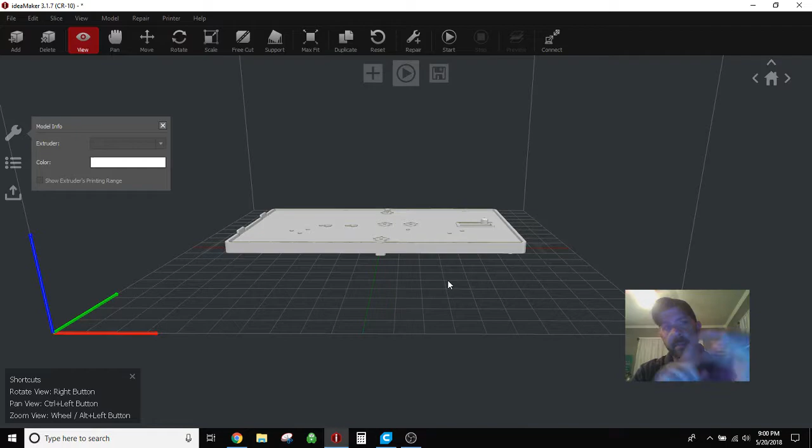Another little Ideamaker tips and tricks video. This one's going to be about orienting your part and even slicing your part, like physically slicing your part, to cut down on print time, material cost, all that good stuff, while still providing a good quality part.

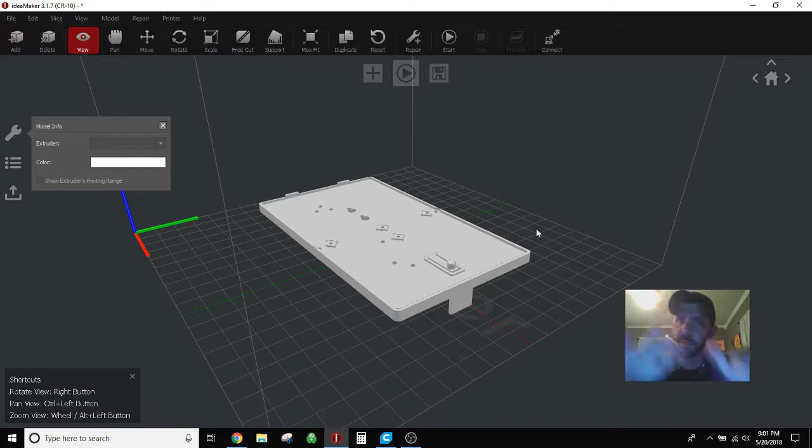So I had this situation come up. One of the mechanical engineers at work had designed this bracket, and for prototyping, he has a printer at the office, but isn't very good at it, to his own admission. And so he was sending them off and having these things done in various different materials, including SLS, so the laser sintering, right, with powder. And this particular part was coming out all warped when they gave it back to him.

And so I said, yeah, next time just throw me the part. Let me try it on my machine, because I really wanted to see if I could get a good part and keep it within tolerance, and I did. So I printed this part in PETG, and it was a very challenging part for a couple different reasons.

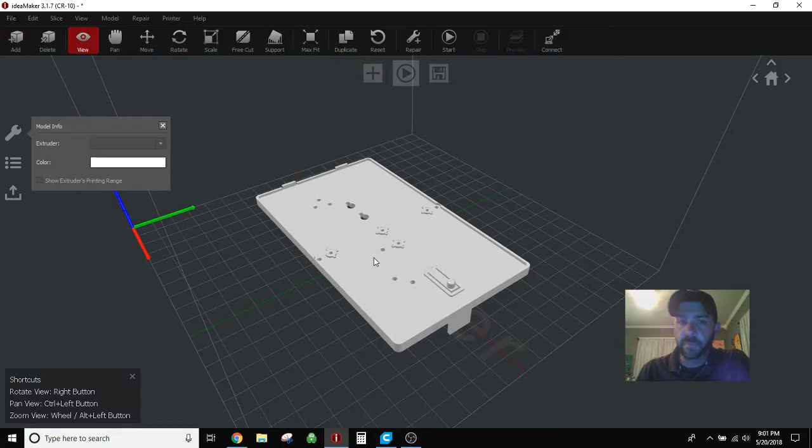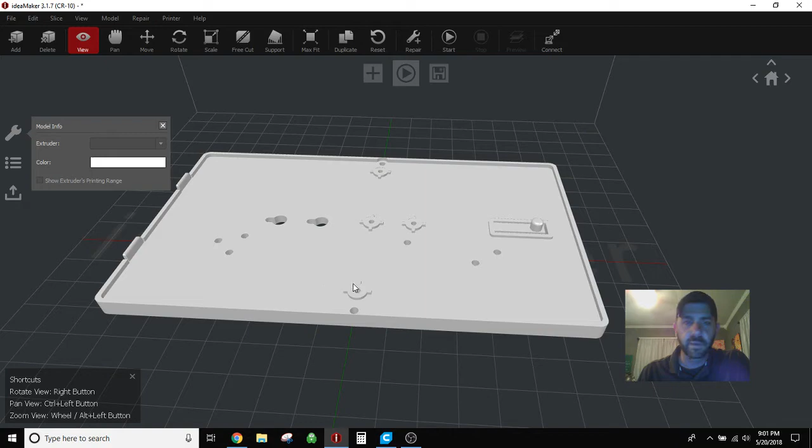So you can see it's not laying flat on the bed because you have the standoff here, and it's got lots of features on top. It's got this little springy mechanism here with the little tabby tongue thing, right? So this thing's going to go like that, and it's got a couple of tabs here, lots of through holes and lots of features. But then you flip it over, and you have even more. You've got a lot more standoffs, and you have these rails that are sticking up.

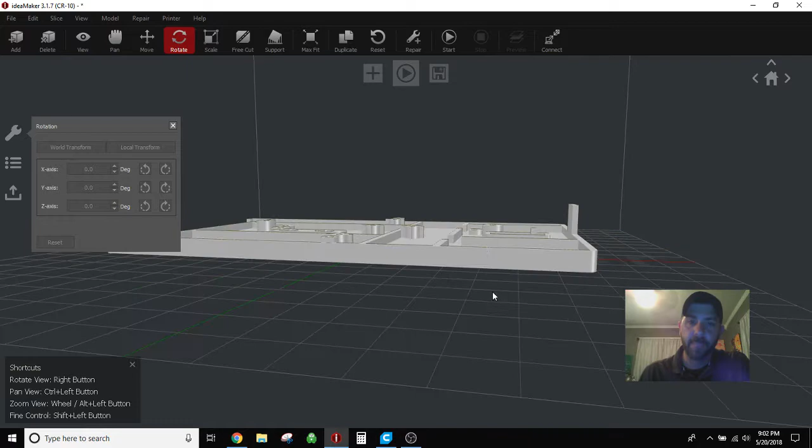But still, if you try and print it laying flat in one of these orientations, it ain't going to look too hot. You're going to have support material all over the place, so it's going to really look like crap. So then I take a look at, well, let's just stand it up on end. Let's print it like a lithophane, and see how it goes.

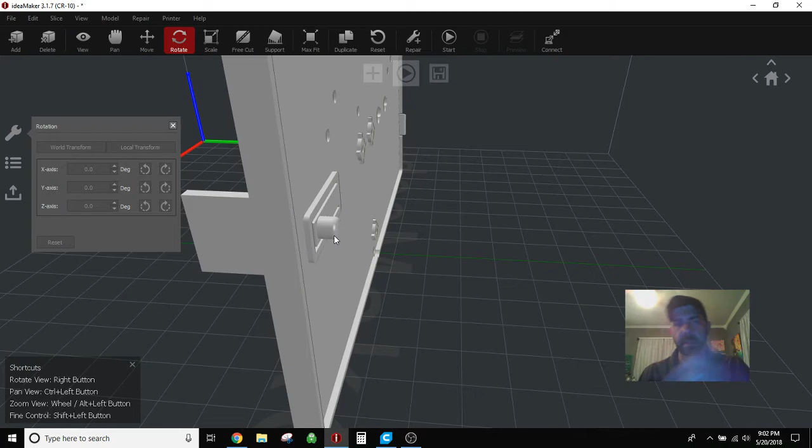Now, I was pretty confident that the printer would do these smaller standoffs no problem. That's not a very big challenge. This little nub belly button, that would have been an issue, and probably these, and definitely when you get around to this side, because I was going to print this in PETG, remember, so running hot, very little fan, so bridging is not good, which means I would have had to do support. Would have had to print this with a brim and with support all over the place.

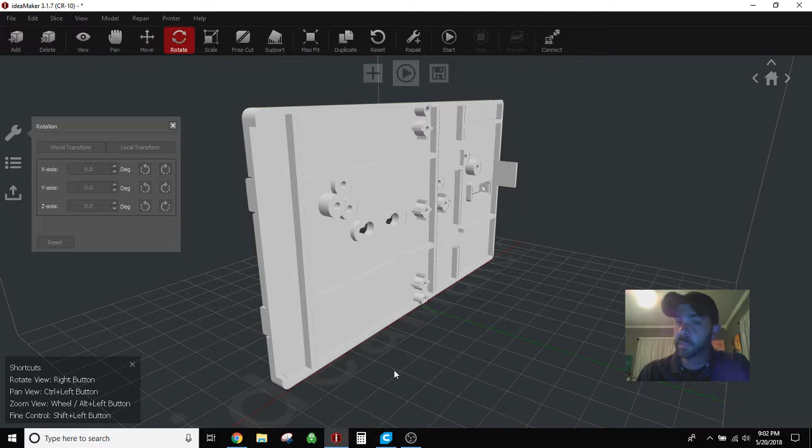So let's look at adding support through this whole thing. All yellow, all support, would have been crazy. It would have done it. I'm confident it would have done it. This would have been just like any other lithophane, except with support. And it's PETG, so it would have been a pain to remove, and it probably would have been pseudo ugly, at least on this surface.

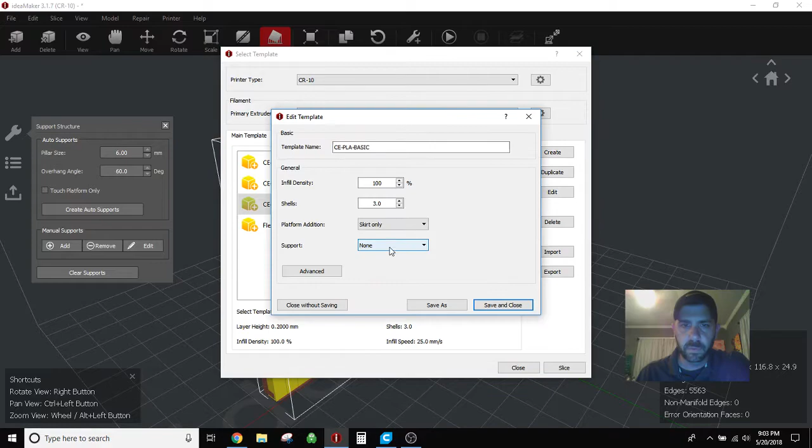So let's slice it real fast and see what happens. We'll just use my basic profile, 100% infill, 3 shells. That's what I did with this one, and it would have been with a brim, but I'll just leave it apples to apples here. Won't even mess with it. Just leave the supports on. Oops. Supports, all, save, slice. Let's see what it says.

So 15 hours this print would have taken, and I would have been stressing the whole time on this part, if it was going to knock itself over, all this stringy goop with PETG. This would have been a stressful print, and it wouldn't have looked too hot.

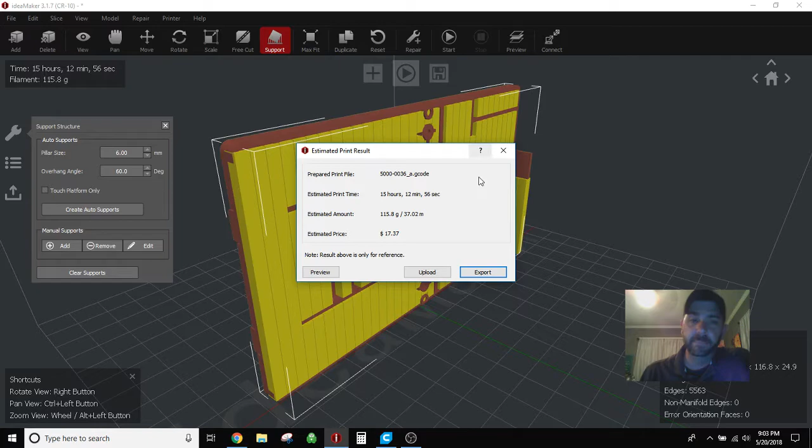So here's what I did. Got a little bit creative with it, and I used some of the tools that are already built in Ideamaker, so I didn't have to go export this out to like Meshmixer and plane cut and do a bunch of stuff. All of those tools are already built into Ideamaker. So let's clear out those supports.

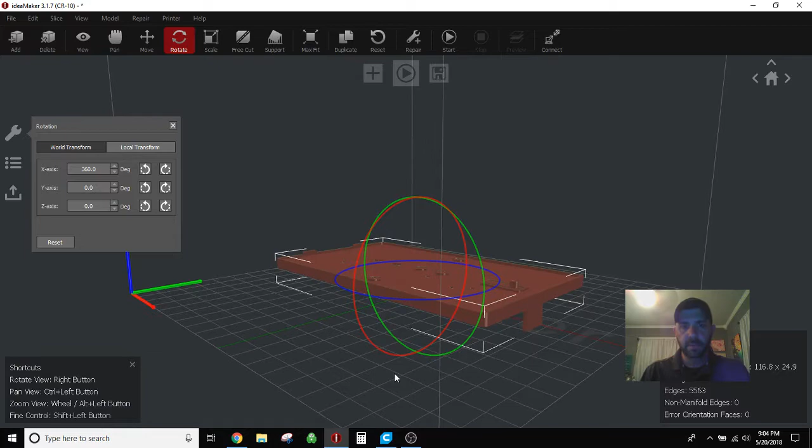Let's put this thing back the way it was, which is just like in this orientation here. And so now what I'm going to do is I want this part to be able to print with the most surface area down on the bed as possible, because I know I can get a good first layer, especially with PETG. And as long as I get a couple of good first layers and finished top layers, I knew I could present a pretty good looking part.

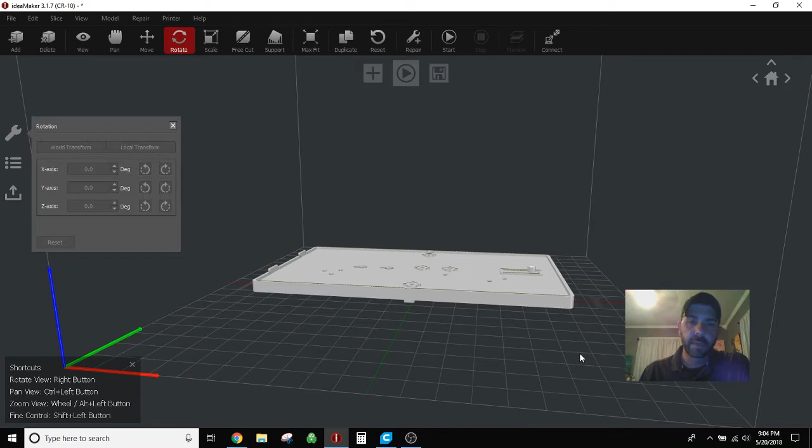So here we go. Here it is. Again, this thing's floating in the air. So we're going to go to our plane cut tool, and I knew that I needed this 18.3 millimeters. That's where I needed my cut. And I knew that because I used the cross-section tool. So let's look at cross-section real fast.

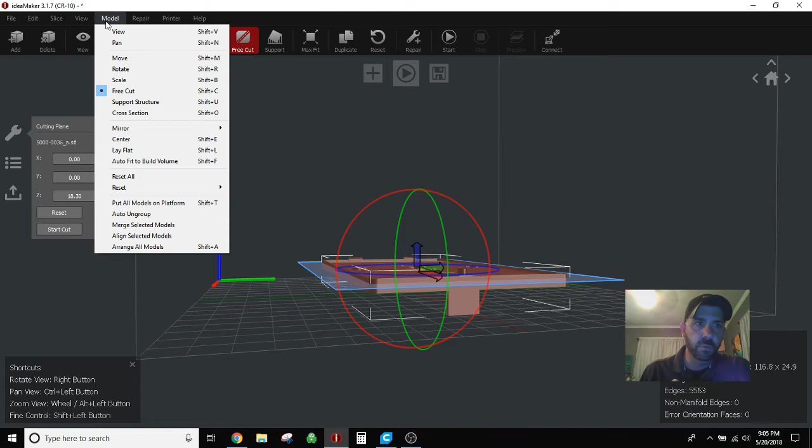If you go to View, Model, and Cross-Section, you get your little cross-section tool here, and if we just drag this guy to about there, and you hit Enable, you can now see a cross-section of that portion of your part. And so I knew that I wanted to come just under, I wanted the bottom of that tab to be the first layer of my print.

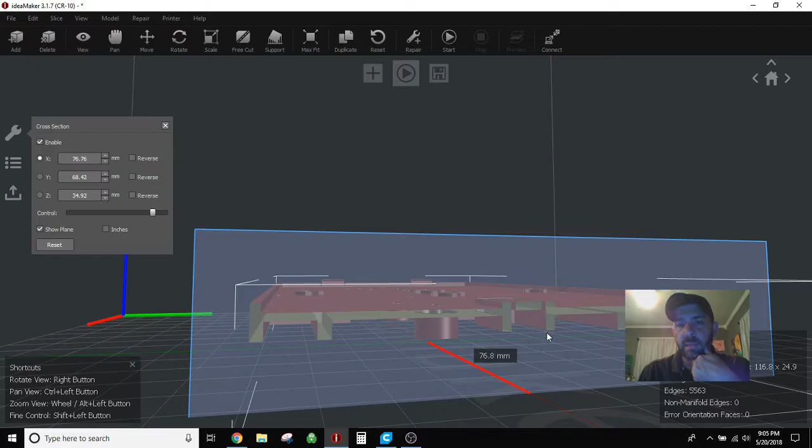And so I basically just did some trial and error to find out where to do the plane cut. But that cross-section tool is really slick. You can move this wherever you want and get a good view of the whole part. So I did that. So let's go back over here to FreeCut. Let's get rid of this. Let's turn that enable off. Let's go back to FreeCut.

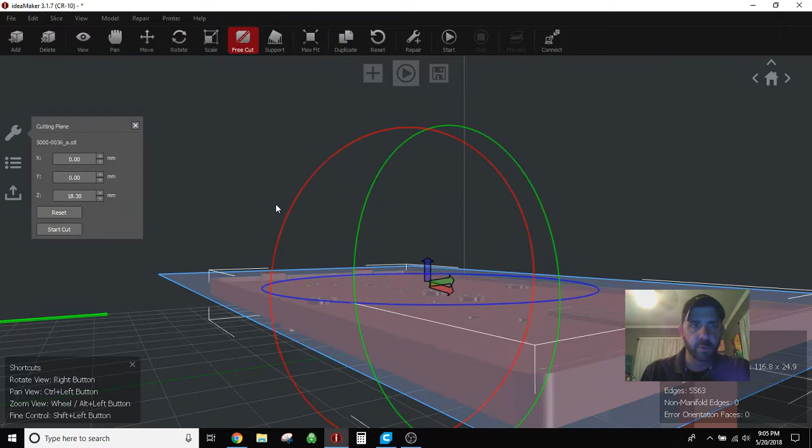So again, I knew that I needed 18.3 millimeters in my Z to cut this thing. So there's my cut. I say start cut. Now I have two parts. So if I export this, I will have two STLs, which you can do in Ideamaker. Bet you didn't maybe know that. Maybe you did. I don't know. So now let's arrange.

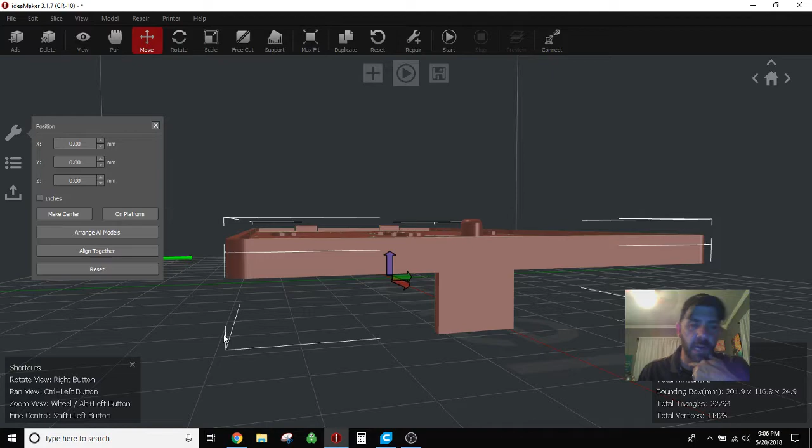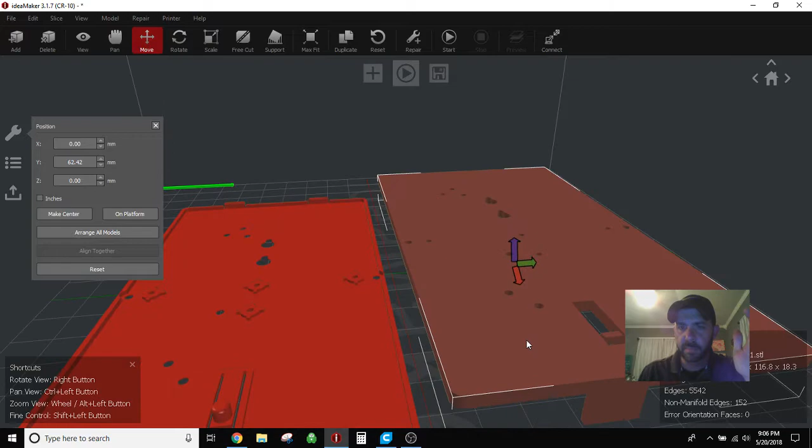Let's zoom this out a little bit. So I'm going to put this guy flat on the bed because he's exactly how I want him. He's got a nice flat side. There's no standoffs, nothing I've got to worry about there from a support perspective. So I'm going to stick him right on the platform. And now, same thing. Now I've got this nice flat surface all over this part to print. So now all I'm going to do is flip him over.

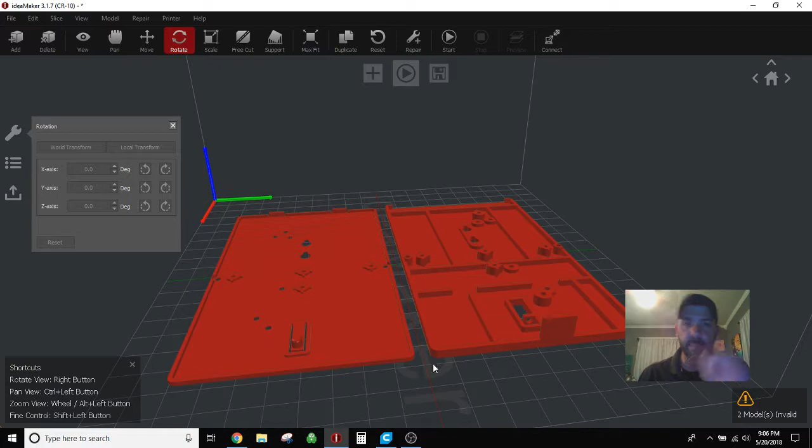And bada bing, bada boom. I don't have any supports to deal with. I know I'm going to get at least a couple of good layers on either one. This one is going to be really thin, but I got two good layers at 0.2 millimeters, so almost half a millimeter thick. But again, once these were done, I pulled them off the bed and glued them back together. So I didn't need something super thick because it was all going to be one part anyway.

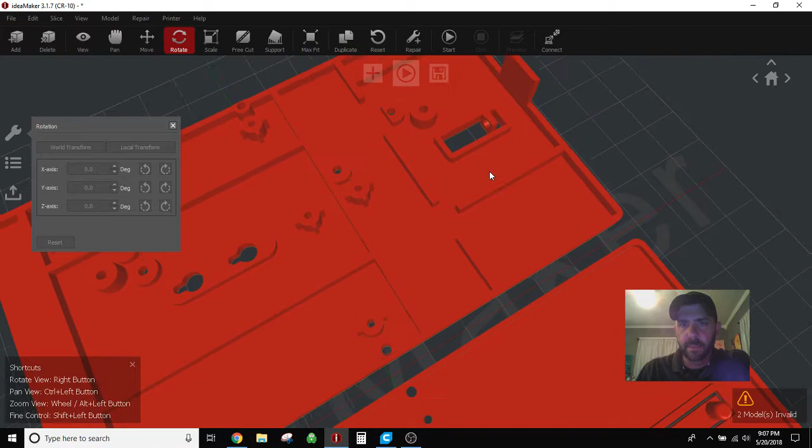And then the only other nightmare piece of this, which really wasn't that bad, was this little tab right here. I knew he was going to print separate because he's a separate body, even though he's part of the model. So basically, once it printed, I popped him off and I fusion welded him back onto the little tab on the opposite side of this guy, because that's where he's meant to go inside of the part.

So let's slice him. Slice. We need no support. Save and close. Slice. And so 9 hours, 33 minutes. So that's a pretty big difference. Remember the first one, standing up with a whole bunch of support, was going to be 15 plus hours. So those two parts together, printing down, is a much less stressful print. And I'm pretty sure I hit the button on this, watched part of the first layer go down, and I went to bed.

Came back the next morning, glued them together, took them to work, and bang, done. So anyway, there you go. There's your tip. So get creative with how you want to slice your part. If you've got something awkward that's got features hanging off on both sides, and you really are sort of losing your mind on how best to orient the print, just try and minimize your support.

Because I mean, support's good when it needs to be good, right? But in cases like this, man, that would have been a nightmare to remove. It would have made that whole one part of the surface probably pretty crappy. Not something I would have been super comfortable with without a lot of post-processing work like sanding and painting and stuff. I wouldn't have wanted to give that to my customer.

Doing it like this, like I said, peeled them off the bed, glued them together. I fusion welded the seam with my soldering iron around the side, welded that one little tabby part back on, this little guy, and I was done.

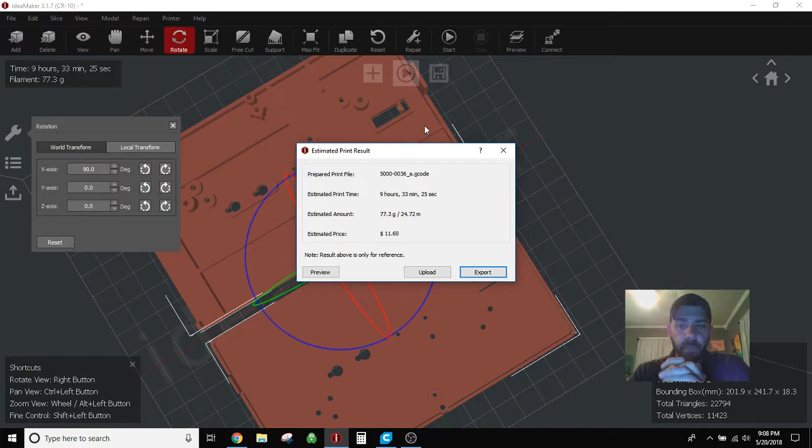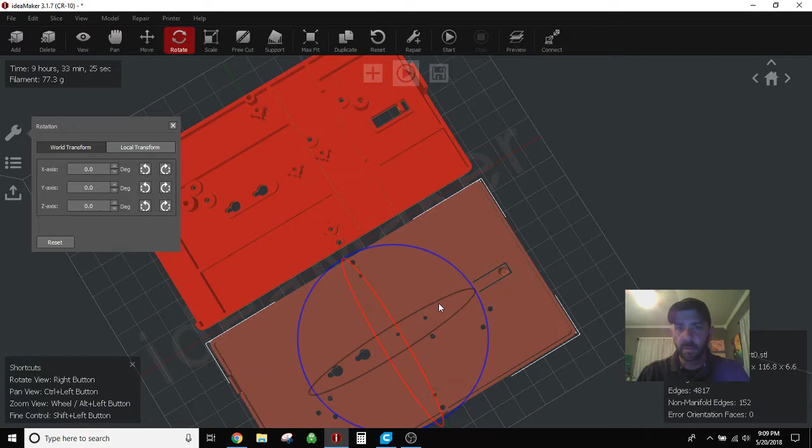So now, just in case you wanted to, let's say you had a different part like, I don't know, a helmet that you wanted to split up into a bunch of pieces, but all you got was the one big helmet file from Thingiverse. Well, now you can slice it up, and then you can export each one of those parts individually. So if I had this part and I have this part, you can go over here to File and Export, and you can export this as part 1. I'm just going to throw it on the desktop.

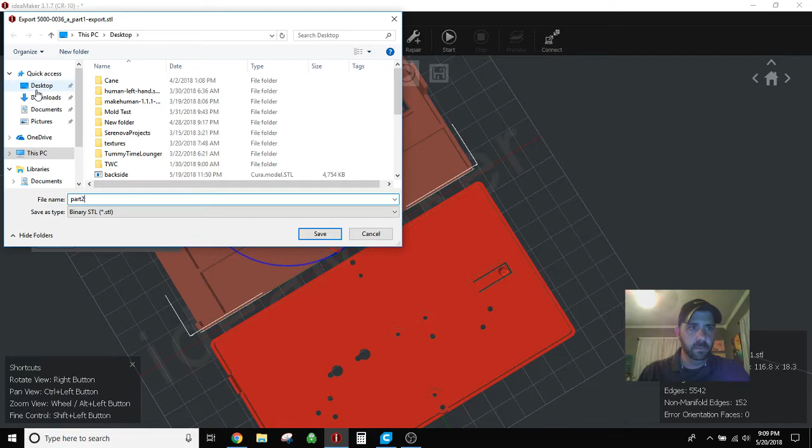Save. Yep. And then same thing, File, Export. Part 2, desktop, and you see they're saving as STL files. Yep. So now you can, I actually did this in 2 goes. Did I? I can't remember if I printed this. No, I did. I printed them in 2 shots because this one only took a couple hours to print. This guy took like 7 hours to print.

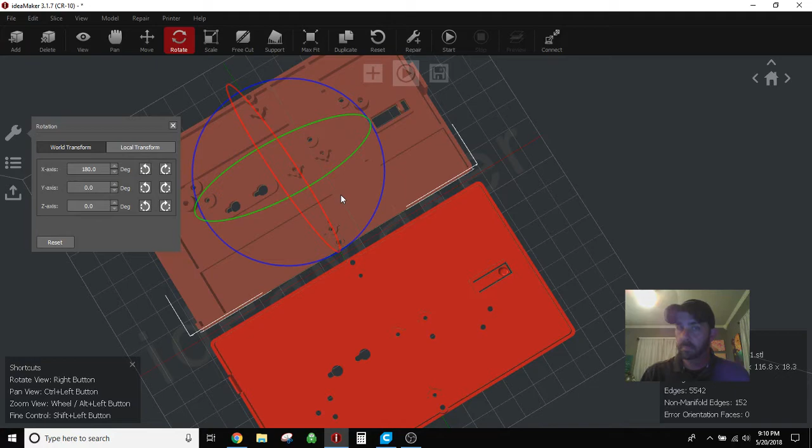So I put him on the SD card, put him on the CR10, put this one on the SD card. Turned right around, printed him on the CR10. So pretty slick. But there you go. So those STL files are now, you've got two models split out of one, and you can export those.

So the beauty of this is, you say, but Mark, I love S3D and I love Cura. Great. Now you got 2 models you can go print using those, because you can't do this in Cura or S3D. Now, they both have their, I have said it once, I'll say it again, right? Ideamaker I use 90% of the time, 95% of the time really, and I use Cura and S3D for one-offs, for the features that Ideamaker doesn't have yet.

But you can't do that slicing and dicing like we just did in S3D. You'd have to take that part, you'd have to sink it into the bed, 18.3 millimeters, slice your model, right? Export that file. Then you'd have to bring it back, reorient it, flip it over, sink it into the bed, do the whole thing over again, and still you have the one file.

Same thing with Cura. You have to sink it into the bed, and unless they've added features that I don't know about, which I don't think they have, because I kind of stay up on that stuff, you don't have the same level of control. So again, if you only used Ideamaker for that, it's worth the free tool. So anyway, it sounds like I'm selling Ideamaker for $99.95. Dude, it's free. Go get it. But it's an awesome tool. Even if you don't use it to print, you can use it for that model manipulation.